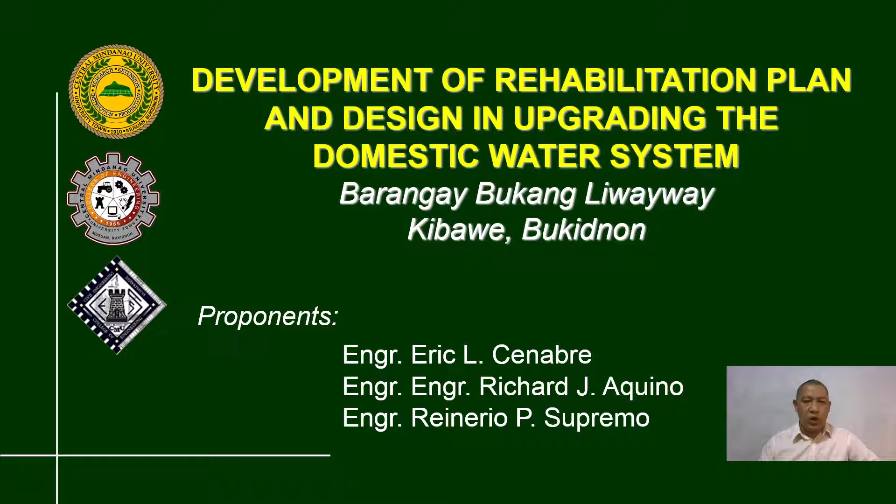I am Engineer Eric L. Cenabre from the Department of Civil Engineering in the College of Engineering in Central Mindanao University, Musuan, Maramag, Bukidnon. My collaborators in this research are Engineer Richard J. Aquino and Engineer Reinerio P. Supremo. The title of this research is Development of Rehabilitation Plan and Design in Upgrading the Domestic Water System in Barangay Bukang Liwayway, Kibawe, Bukidnon.

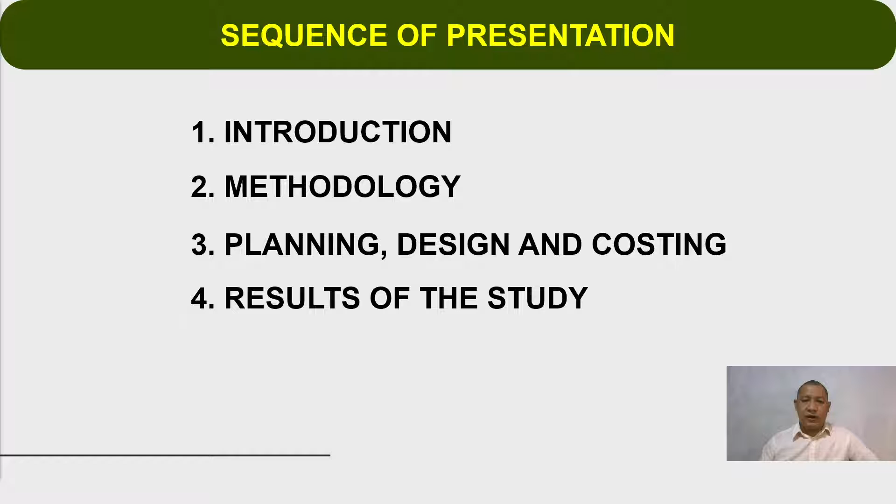The sequence of my presentation is as follows: first, introduction; second, methodology; third, planning, design, and costing; fourth, result of the study; and fifth, recommendations.

Water is a very vital element for humans and their welfare. It has been one of the most crucial factors in human development. According to the research of Rubio and Company in 2005, the Philippines still confronts severe challenges regarding water shortage, water quality, accessibility, and temporal distribution, despite the ampleness and wide variety in its water resources.

The area of study is Barangay Bukang Liwayway in Kibawe, Bukidnon. It is among the places in the Philippines that faces problems with their water system. Barangay Bukang Liwayway is one of the geographically isolated and disadvantaged areas, with a 9 out of 10 poverty ratio. Based on the census conducted by the Philippine Statistics Authority in 2020, this barangay has a total population of 960. This barangay is located in the mountainous area of Kibawe, Bukidnon, along the Pulangi River.

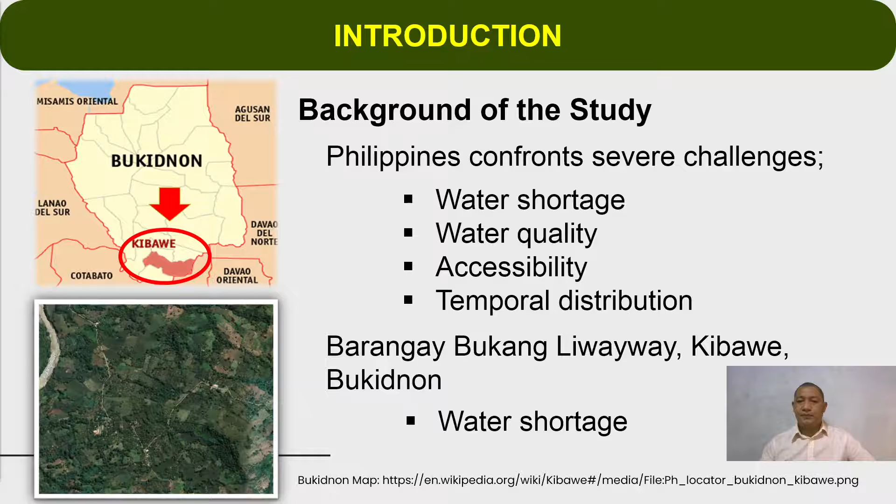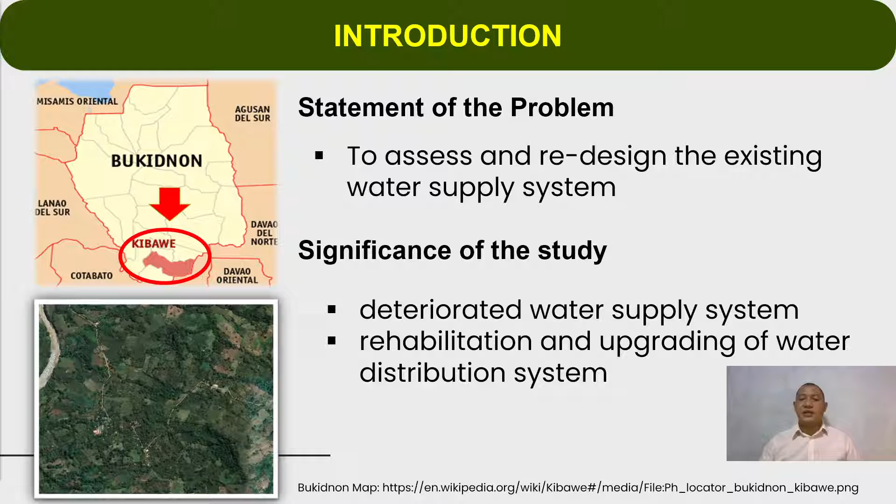As the population rises, the water demand also increases, resulting in an inadequate water supply. To ensure the availability of domestic water in the community, assessment of the water system is necessary. The existing water supply system in Barangay Bukang Liwayway was proven to be deteriorated, which causes shortage of water supply, especially in the dry season.

So, rehabilitation and upgrading of the water distribution system should be established. This study was conducted with the aim to assess the existing domestic water system and design a sustainable water system in Barangay Bukang Liwayway. The specific objectives are to assess the existing water distribution network and hydraulic structures, and based on the result of the assessment, prepare the water system plan and design and the program of works in order to rehabilitate and upgrade the current barangay water system.

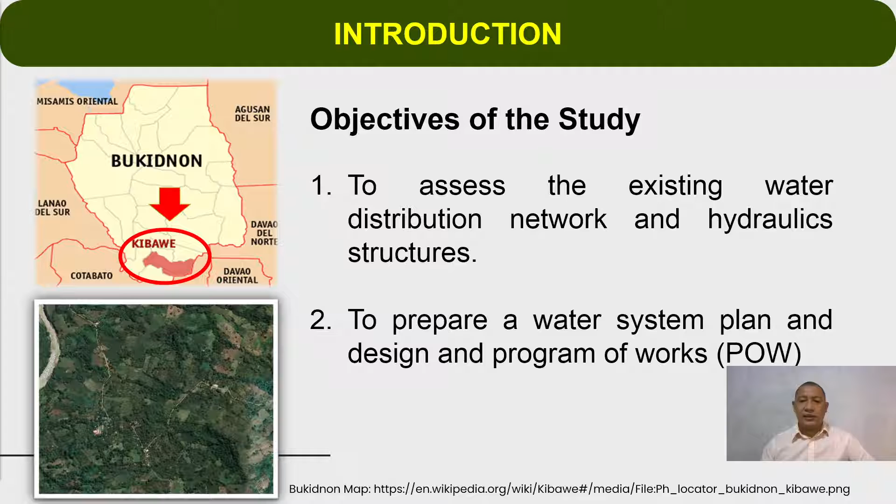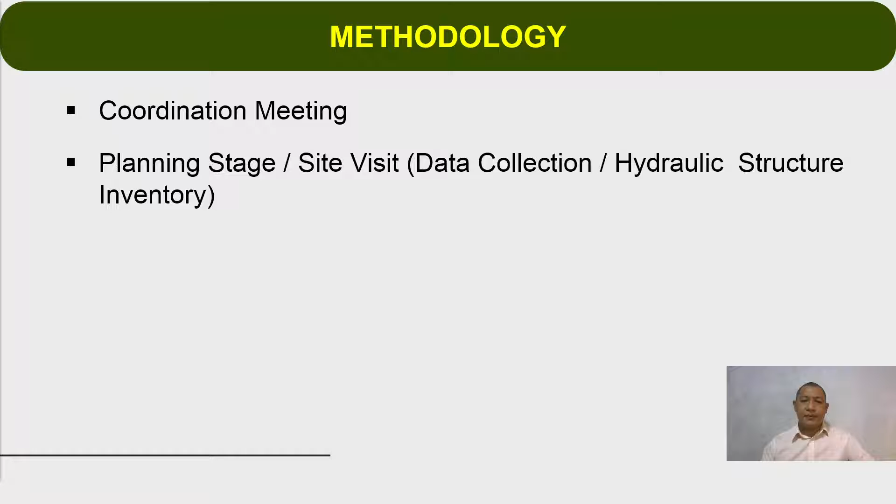The framework of the study: first, coordination meeting; second, planning stage; third, design stage; fourth, costing of the proposed project; fifth, preparation of the final plan, design, and program of works; then the validation meeting.

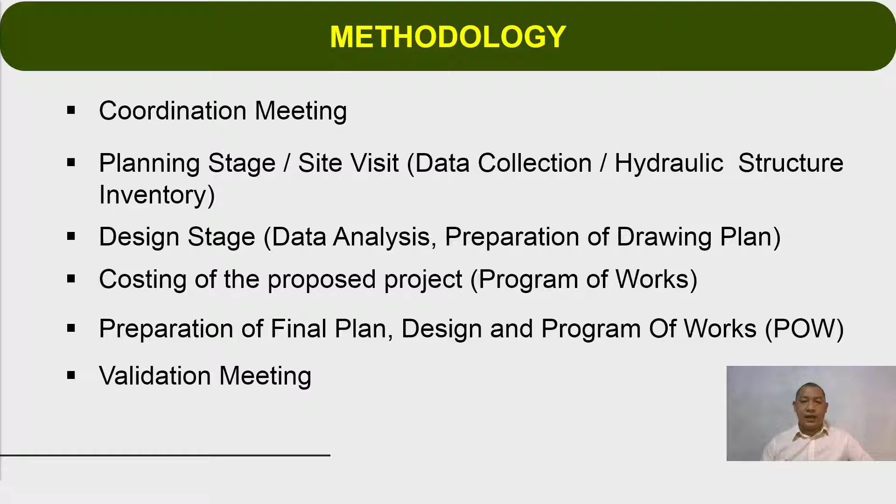Prior to the start of the study, a coordination meeting was conducted with the mayor of the municipality of Kibawe, Bukidnon, along with the barangay officials of Bukang Liwayway. Important concerns with regards to the research were discussed. Information about the water sources and other secondary data, such as the barangay map and other necessary data, were also acquired. The meeting was formally concluded by signing the MOA, or Memorandum of Agreement, between the researchers of Central Mindanao University and the municipality of Kibawe, Bukidnon.

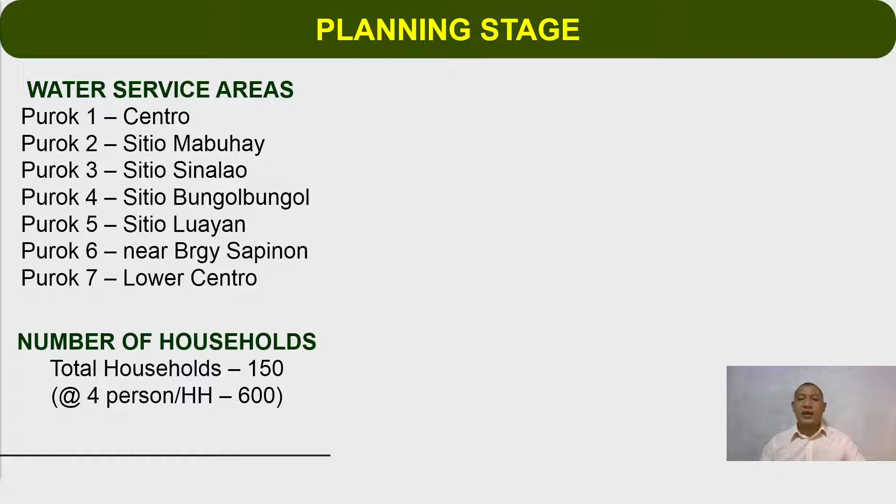Site visits and surveys were then conducted. The following 7 puroks are the water service areas in the barangay. Based on our survey, there were around 150 households in the water service area. At an average of 4 persons per household, there are approximately 600 individuals in the area.

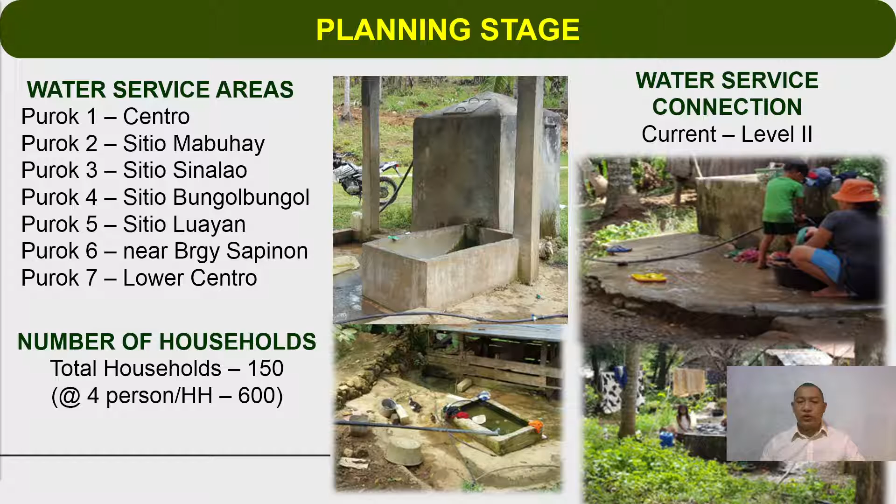The current water service connection is level 2, a common faucet system. The system is composed of water source, reservoir, pipe distribution network, and communal faucets. The proposed upgrading and rehabilitation will be level 3, meaning individual households will be connected into the water pipe distribution network.

Currently, there are 2 springs that supply water to the service area of the barangay. Spring number 1 is located in the forestal area at Purok 4. Spring number 2 is located in a farmland at Purok 2.

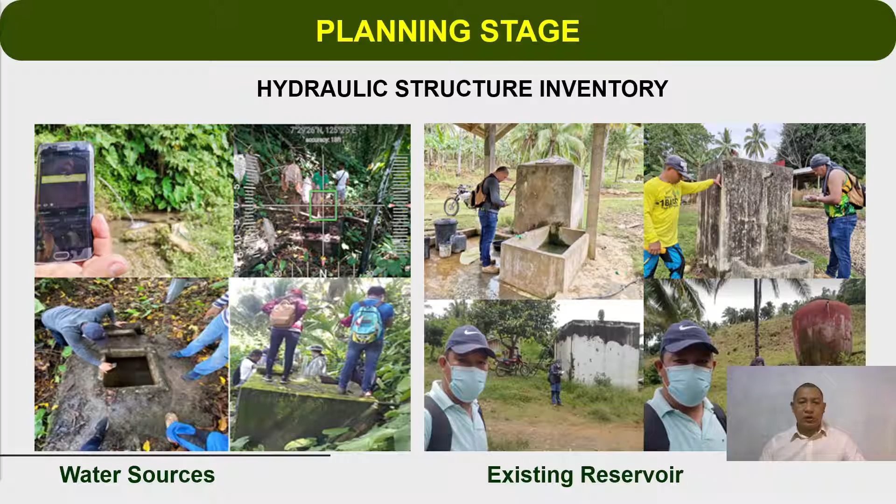As per our site investigation, we found that most of the pipeline were exposed in the ground. Some pipes were heavily damaged during the rehabilitation and construction of the provincial road and the barangay roads. There were pipes damaged due to human activities in the farm, and most of these pipes were deteriorated due to the long exposure to the weather.

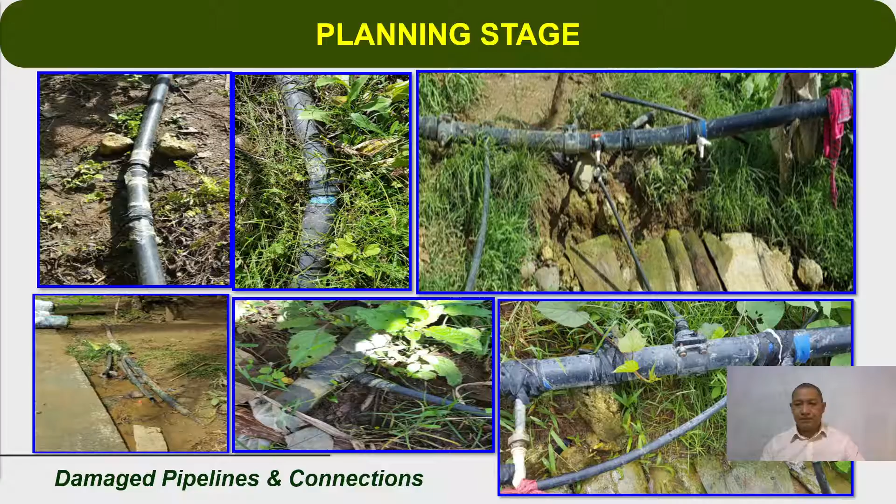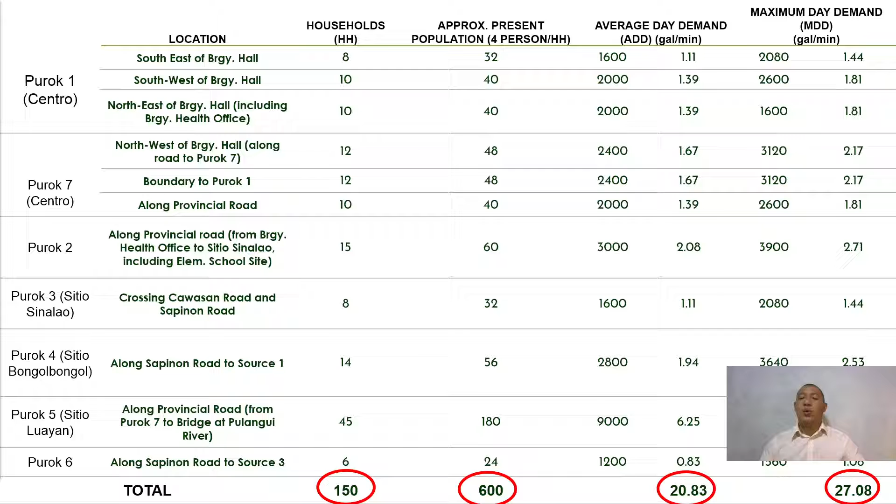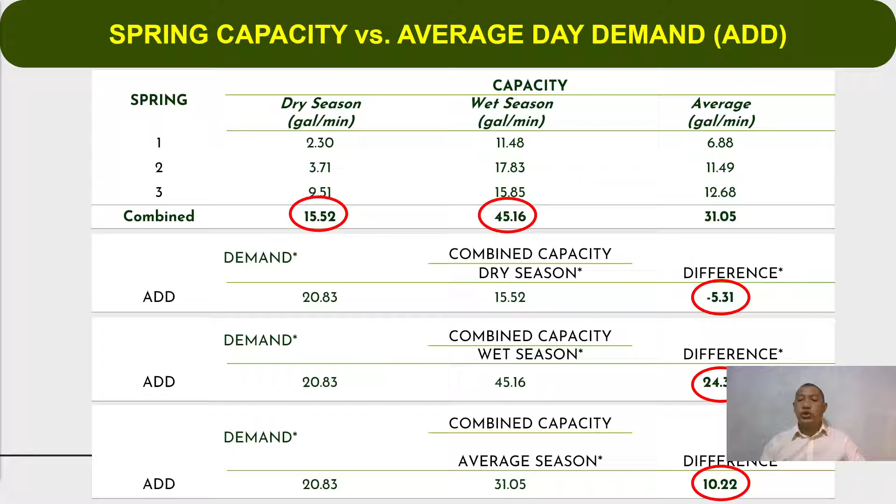The combined capacity outflow of the 3 sources during the dry season is equal to 15.52 gallons per minute, and during the wet season, it has 45.16 gallons per minute. Subtracting the average daily demand from the combined spring capacity during dry and wet season, it was found that there are a lot of surplus water outflows during the wet season, but it has a shortage of 5.33 or 5.31 gallons per minute during the dry season.

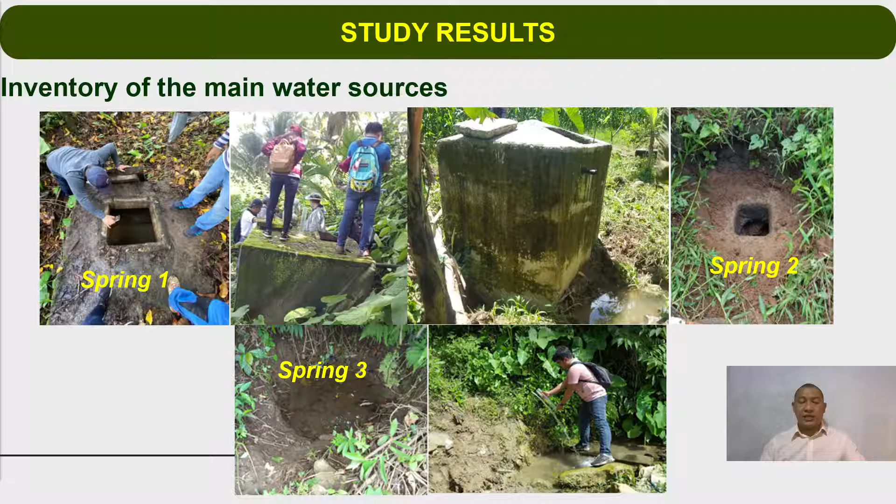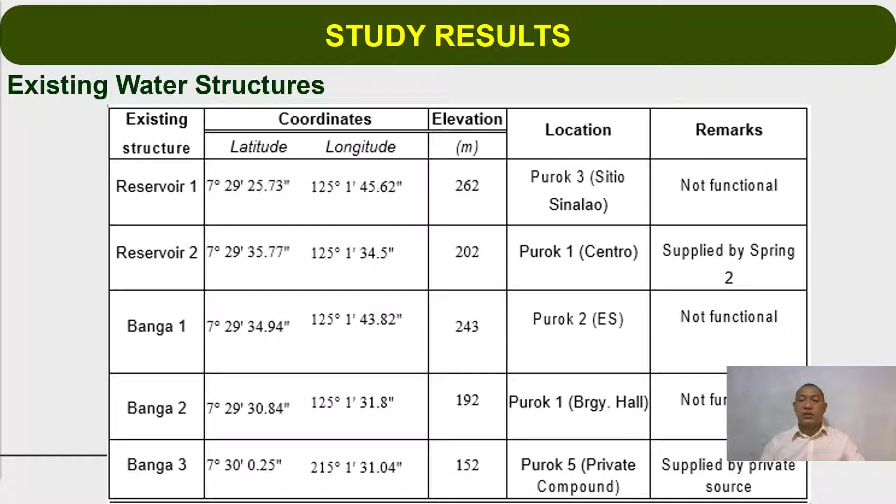It's shown in the tabulation the inventory of the existing reservoir. There are 2 rectangular concrete reservoirs and 3 banga-type concrete reservoirs, and an additional 2 more reservoirs to be constructed strategically to distribute the water in the barangay.

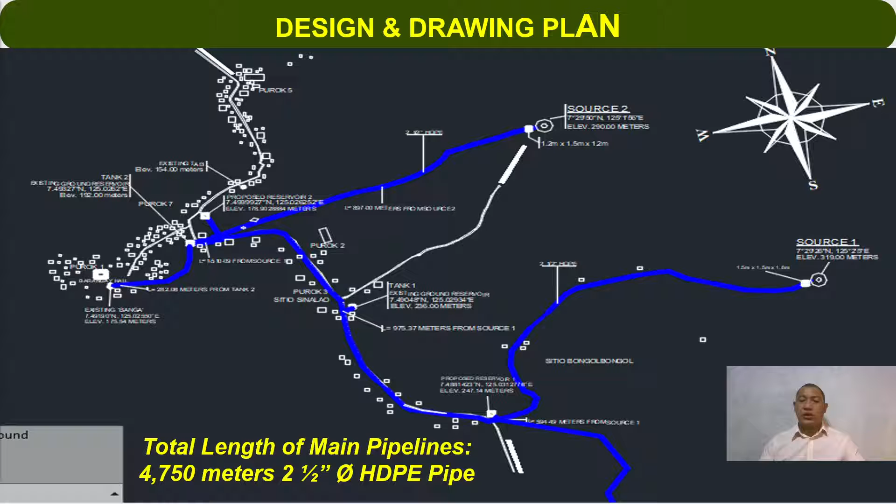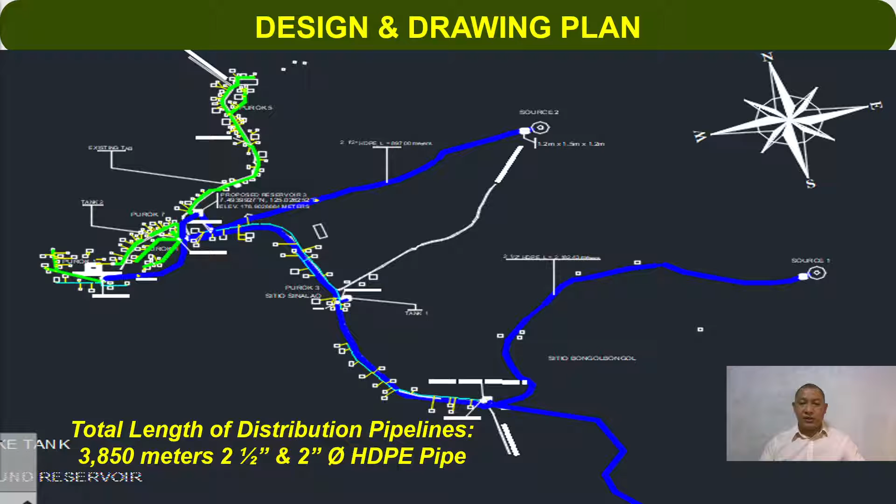This is the layout of the water distribution lines from the different reservoirs connecting to the households in the service areas. It requires a total of 3,850 linear meters of combined 2 inches and 2.5 inches diameter high-density polyethylene pipes.

Shown in the figure are samples of drawing plans for the proposed, additional, and existing concrete structures, and the typical pipe connections and pipe fittings.

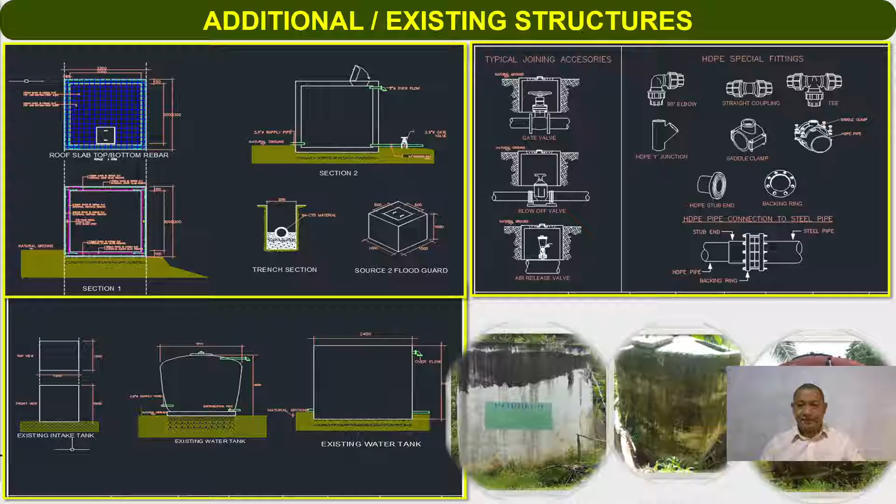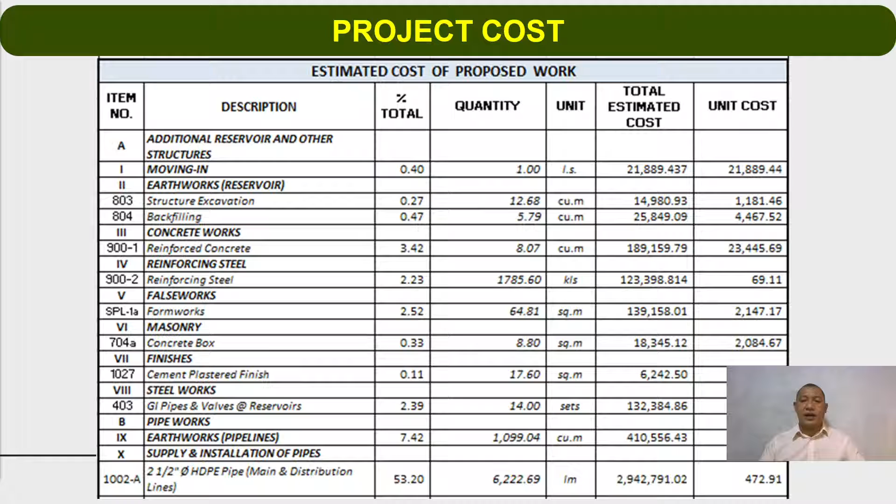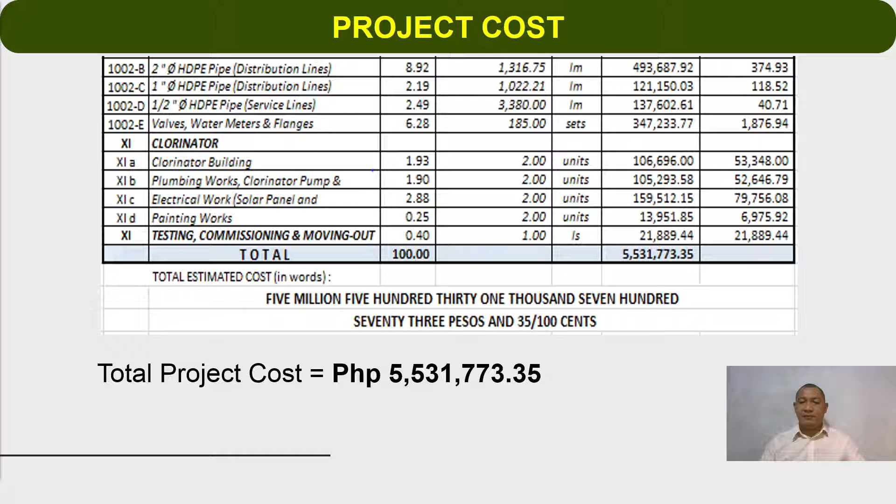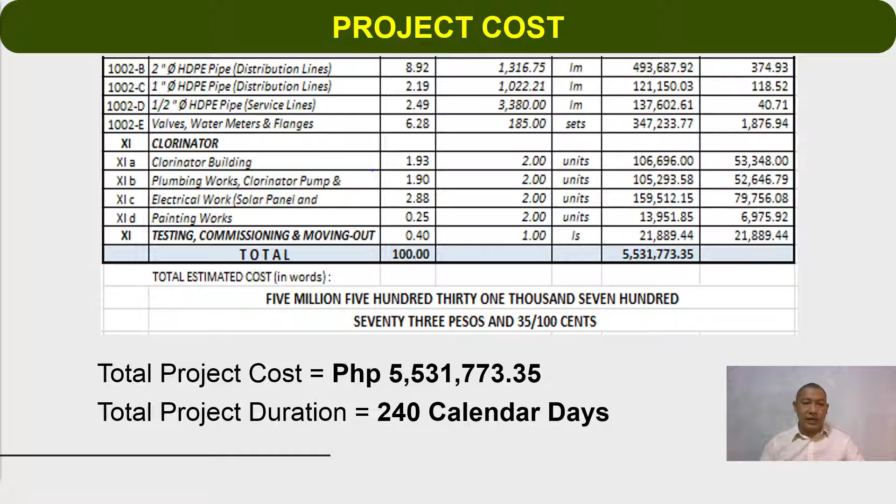The tabulation shown in the figure are quantities and estimated cost to rehabilitate and upgrade the current barangay water system. The proposed project has a total project cost of 5,531,773 pesos and 35 centavos, and it will take 240 calendar days to complete the proposed rehabilitation and upgrading of the existing water system in Barangay Bukang Liwayway.

A validation meeting was conducted by the researchers with the mayor of the municipality of Kibawe, Bukidnon, together with the concerned barangay officials. Important concerns regarding the output of the research were discussed during the meeting. It was concluded by handing over a complete set of drawing plans and program of works of the proposed project to the municipality mayor of Kibawe, Bukidnon.

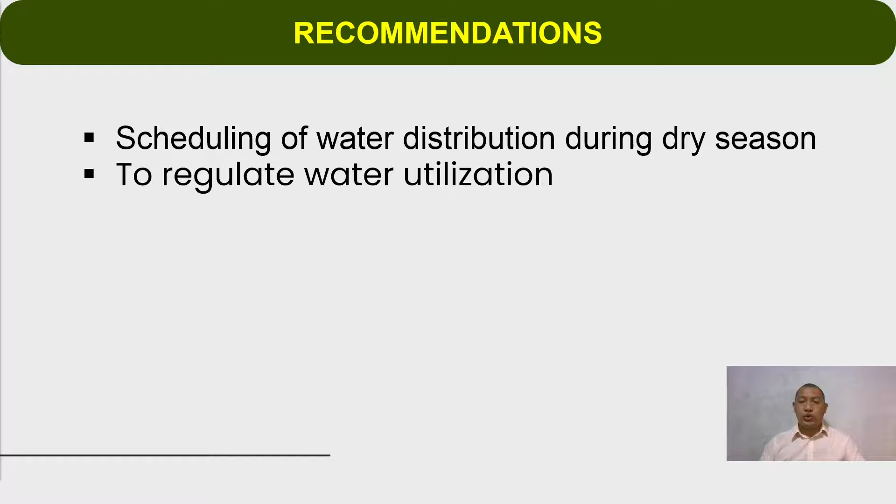The following are the recommendations. First, to schedule water distribution during the dry months. Next, it is recommended to regulate the water utilization and a minimum charge of consumed water to the consumers. Also, it is recommended to conduct regular inspection and maintenance work to prevent leakage which may result to water losses and water contaminations.